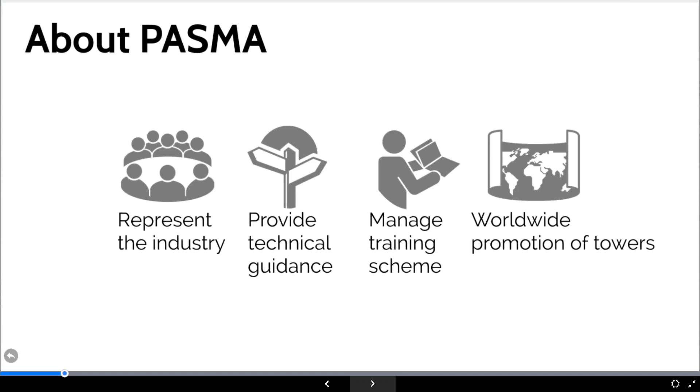So what we're going to cover in this webinar is essentially in 5 parts. We'll start with the safe use of mobile access towers at low level, before exactly why we need inspection and recording, which is critical to safe use, and what products there are.

Now EN 1004 is currently in review, and we know PASMA knows some of the proposed changes, so we'll have a quick overview of what to expect. Finally, we'll look at some of the mistakes people make when using mobile access towers, and see if we can get a bit of interaction at that point.

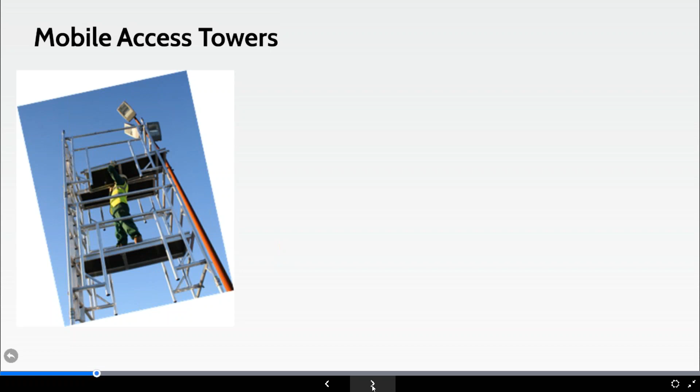There are many ways to work at height, but why select a mobile access tower? Clearly towers are a lightweight option for safe working at height, and ideally suited to provide a temporary working platform. The towers are modular, manufactured from lightweight materials, so the components are easy to transport and very easy to inspect.

In partnership with the Health and Safety Executive, PASMA have identified 2 agreed options and methods for the safe assembly and dismantling of towers, known as the 3T method and the AGR system, Advanced Guardrail System. PASMA trains and instructs delegates on the correct application of both options, so if you send operatives on a course, they will cover both of these agreed methods.

Towers can be used in multiple configurations, meaning they're much more capable than just a standard tower assembly. We see a standard tower assembly on the left using the AGR system, but there are many more dynamic ways to use a tower. In truth, it's fairly simple to assemble, doesn't require any specialist tools or equipment, and clearly provides a safe working platform.

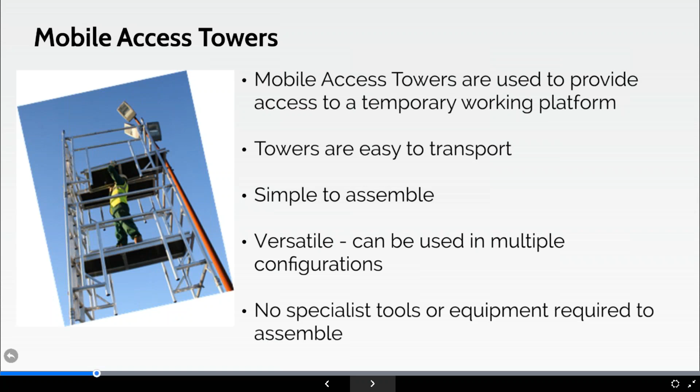Tool and plant hire sectors and rental sectors are major suppliers of mobile access towers, for both construction and maintenance industries. You can frequently see mobile access towers delivered to site at the same time as the task equipment required to undertake the particular task, and they're going to put the tower up, carry out the necessary inspections, and then use it accordingly. Fairly simple, fairly straightforward.

PASMA worked with the Health and Safety Executive to define 2 options for the safe assembly of mobile access towers: the 3T, through the trap, and the AGR, Advanced Guardrail. Here is an actual still image taken from the new PASMA user course, clearly showing operatives using the 3T method to ensure that whoever is building, adapting, modifying or dismantling it remains in a protected position, not working on an unguarded edge.

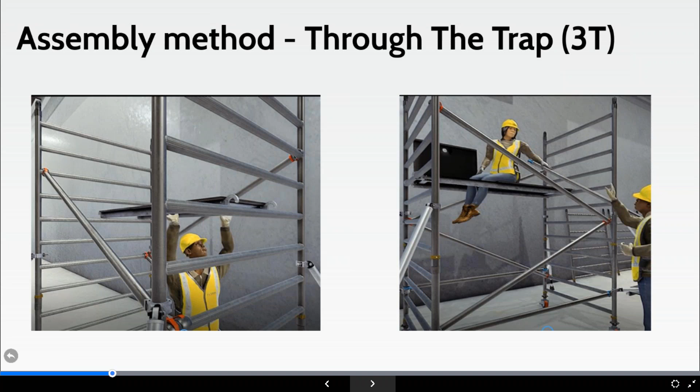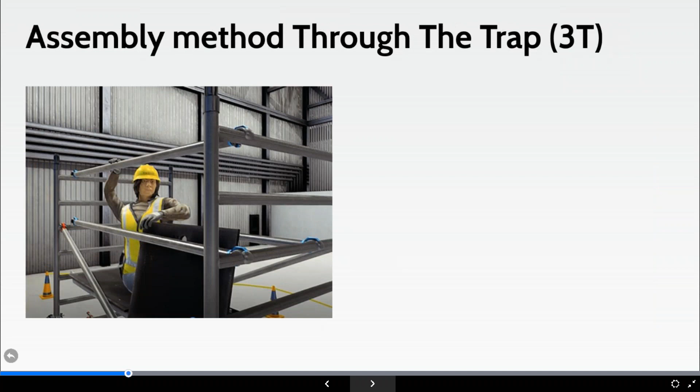You can see the gentleman on the left fitting the platform, and the lady on the right taking up a position through the trap, hence the term, with the operative passing up the guardrails so she can put them into place. Once the guardrails are located by the operative from a protected position, this requires the operative to sit on the platform until all four horizontal guardrails are in place.

Only once all four horizontal guardrails are in place should that person stand on the platform. You can actually fail the PASMA course if the person stands up there with no guardrails fitted, and that has happened on tower courses I've run in the past. Unfortunately it's not a good discussion, but it is part of what we teach.

Build sequence basically means the mobile access tower has to be built with the smallest frame at the base, which always ensures the guardrail frames are in place before standing on the platform. Fairly straightforward, hence why it's called through the trap. It's a well used, well documented assembly method. You can see here that this side of the guardrails are clipped in, but the ones at the back aren't.

Once the 4 guardrails in this situation, because it's a single platform, are in position, the lady will stand up, walk to the back, and click them guardrails in, and at all times she's protected from falling. Then the build will continue up to the next level.

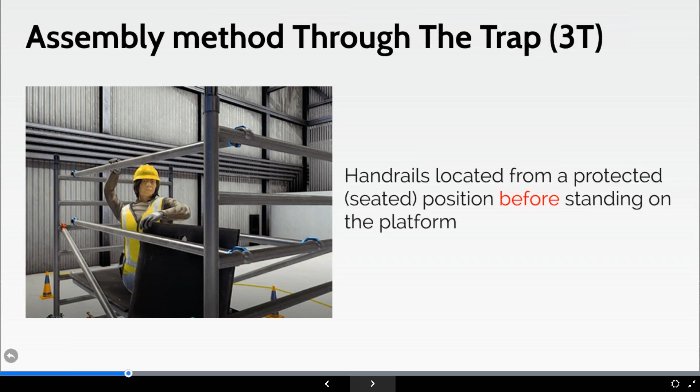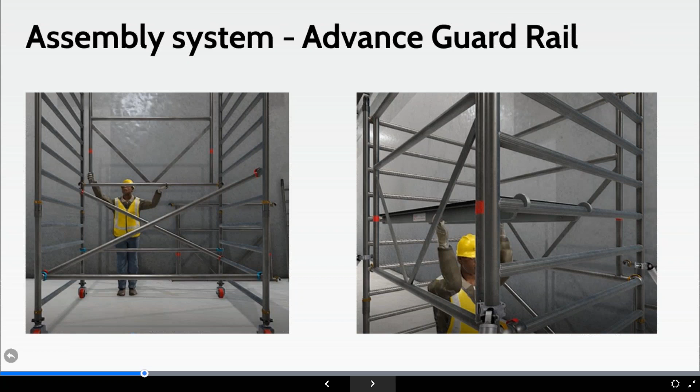Conversely, the alternative build option recognised by PASMA and the Health and Safety Executive is known as the Advanced Guardrail, and the AGR system is provided by a number of manufacturers. On an AGR tower, the frames are located in position before the platform decks. You can see the operative on the left fitting the AGR rails to the uprights, and on the right positioning the boards in place. Once the boards are positioned, as they climb up, the guardrails are already in place, and the same process happens again.

They'll put another set of frames up on top on the left hand side, do the same again, put the advanced guardrail in place, hence the term advanced guardrail, and then place the boards in. So this is a system rather than a method, and it's important you understand that the 3T is a method, there's a methodology there. This is a system build essentially, and you can see that advantage. Handrails are going to be in place at the correct height before they've even got up into the platform. So essentially, providing there's no horseplay and such, there's no essential risk of falls.

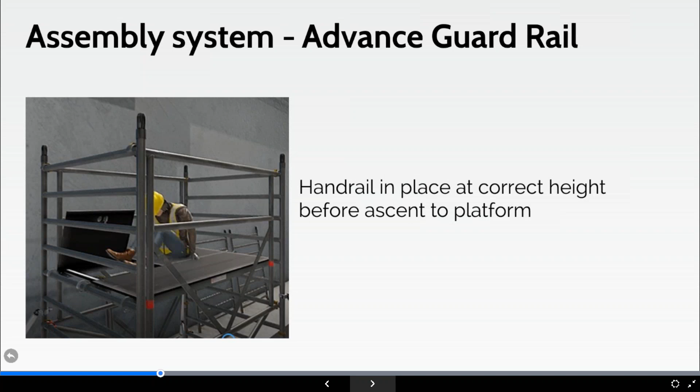So just to reiterate, the advantages of through the trap. It's obviously clearly easy to store and transport the braces. It's versatile in its configuration. It can use existing tower components. Obviously, there's got to be ensuring that the towers are from the same manufacturers and such. But basically, again, build to the manufacturer's spec and the instruction manual that will be supplied with the machine.

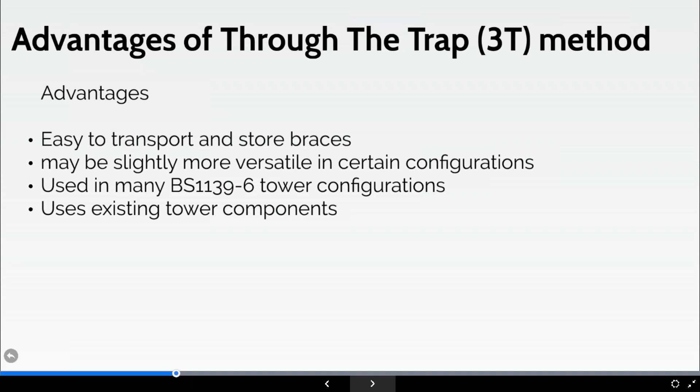Okay, from the AGR part of things, if some of you have ever built the tower using the 3T method, I can tell you now from experience, whenever you put the AGR in front of people, certainly delegates, they sometimes look and think, God, this is going to take forever. It's simple, it's faster to assemble and dismantle in its standard application. Remember, this is a system rather than a method. It's essentially that you've always got people working on the platform with full side protection before they get up there, and clearly it's less components to transport than the 3T method.

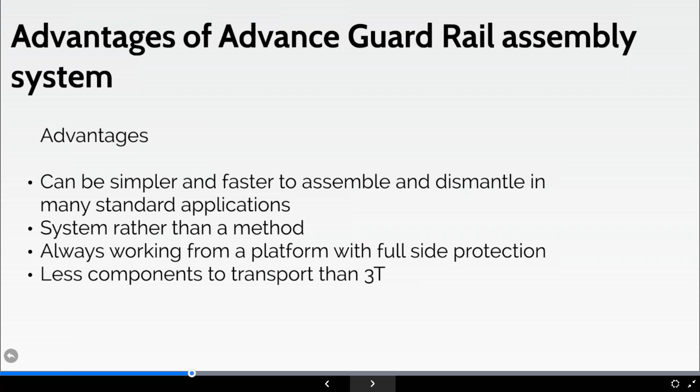Okay, so hopefully that's the two methods put in there, and hopefully that makes sense. You can see there's been a fall protection review, and PASMA work very, very closely with these sort of things, and the key factors in specifying the appropriate assembly option. So I just want to put this in here. Which option are you going to specify on your jobs? Again, does cost factor in? Is the speed a factor? Is it the experience of the operator? Is it essentially down to user preference? Sometimes we don't really understand perhaps what's out there, until you've actually seen them being built, realizing the benefits for them.

Now, basically PASMA have produced a fall protection review, and it gives you details on both options, and PASMA's views on when appropriate to select a certain type of tower, so either a 3T or a system building in terms of an AGR system. Okay, but again, in terms of these, fairly straightforward and fairly straight to the point.

Okay, so just moving on, we're now going to look at low-level access. It's fair to say this has changed dramatically over the last 15 years, and basically in terms of the PAS 250 to 8620, basically the publicly available specification is a sponsored route to help standardize a product.

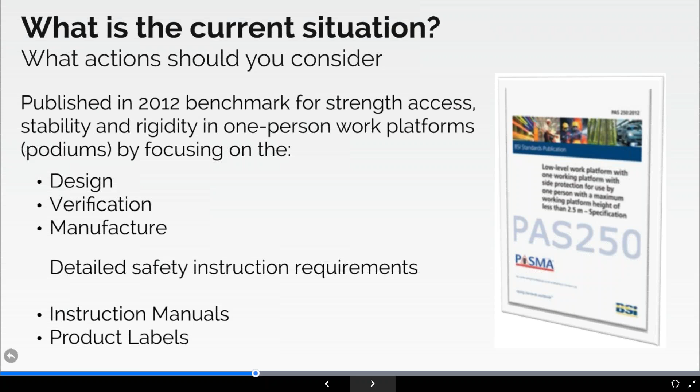Which manufacturers are going to design and manufacture and build them? And then, of course, instruction manuals. What content goes into an instruction manual? There's clearly all sorts of other aspects in there in terms of training. What labels does it need on the side of it, etc. So there's quite a few things there to sort of think and consider. And the current situation is, you've got action, and this is going down the line here. You'll see shortly, we're kind of highlighting some of the issues here very shortly.

So this was reviewed by a panel of industry experts, including users. Best way to get involvement is get the people at the coalface involved. Does it work? Does it do what it needs to do? Clearly, the Health and Safety Executive and trade associations, and to enable that transition to a British standard, PAS 250 was reviewed by a panel of industry experts, including representatives from users, HSE, and trade, which of course included PASMA.

Lessons learned from the drafting and implementation of PAS 250 are reflected in BS 8620, with improved stability and enhanced specifications for side protection, meaning there'll be even greater buyer confidence with British standards recognition. So we had the PAS 250, it did what it did, and then that's moved into 8620.

So, do you use podiums? What's the current standard? What do we need to think about?

What recommendations? Well, PASMA recommendations, and to be clear, if you own or rent BS 8620 podiums, you are using products to their current standard. Continue to use them. Inspect as per the instructions supplied with the product.

So no change essentially. If you own or rent PAS 250 products, you can clearly continue to use these if they're in good condition. However, PASMA do advise that you update your buying policy now to ensure that going forward only BS 8620 products are either rented or purchased in the future.

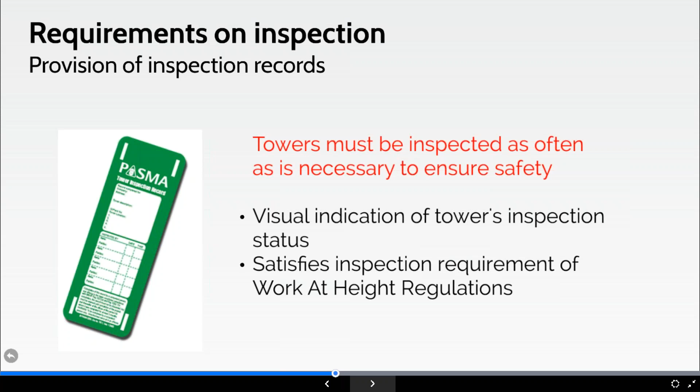If there is a fault with it, for whatever reason - damage, piece missing, whatever - quite simply you would pull the green one out, like you see on most construction sites or in the maintenance industry, and flip it round, and then on the back of it generally it's red. But basically it's a very quick visual indication of its status, and it does satisfy the requirements of the work at height regulations. So to me it's a no-brainer.

In terms of the requirements, again, these are clearly defined. They should be inspected after assembly, after any alteration, after any adverse weather conditions, before dismantling, and at least every 7 days. Now that inspection must be undertaken by a competent person. The results should be recorded and retained for reference. PASMA's perspective is that it's essential that towers are inspected as often as is necessary to ensure the safety of people using the towers.

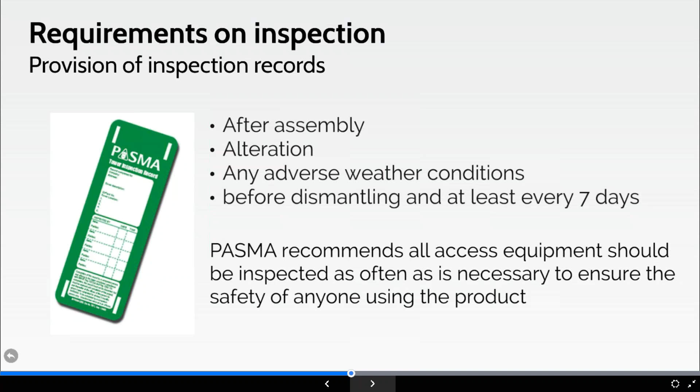Okay, not only does PASMA carry out all the training courses, and there's a wide range of training courses from users for towers, for managers, to towers on stairs, to riggers and advanced courses. So there's more to PASMA than just a tower course. There's more to it, so again, you've got to consider these things.

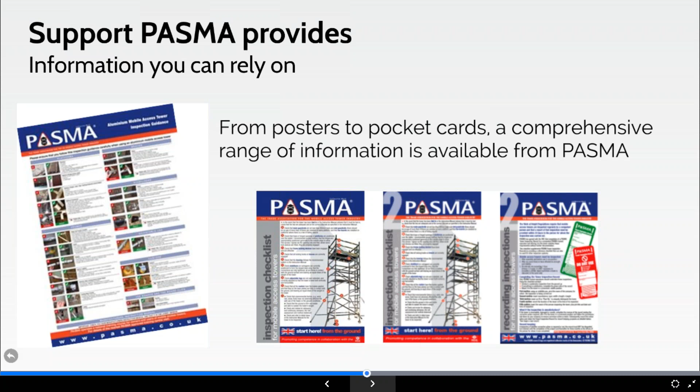But they do have a range of resources out there as well, and these are to help yourselves and managers of people and those who are working at height to understand their obligations. Now these are available in a range of sizes and formats, and the advice is invaluable for people working at height. So you can find more information at PASMA's website in their shop, or of course at any PASMA training centre. These will include things like posters, pocket cards, quite easy to read and comprehend.

The range of advice also goes on now to include a series of info sheets detailing key information to ensure you can also work well with towers. And you can see perhaps some of the info sheets here. If you log on to PASMA's website, www.pasma.co.uk, or download the PASMA app from the App Store, you can get further guidance and support.

Because with respect, we know you're busy people. You look at a tower and hopefully it's got a green ticket attached to it - happy days, move on. But is it built properly? Has it been inspected? What type of tower is it? Is it a system AGR? Is it a method 3T? Even look at them when they're building their towers - do they sit down when they go through the trap? All those little things that you perhaps think, again, we're just trying to mitigate the risk of a serious incident.

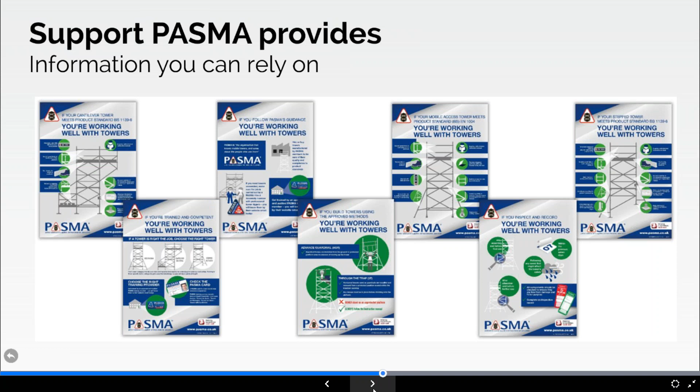Okay, so PASMA website, you should be able to get some information there. If you go onto the PASMA website at the moment, you'll probably be redirected to PASMA Tower Week, of which it's champion at the moment. But you'll be able to navigate around their website.

A major part of PASMA's work is contributing to the setting of product standards, and a review of EN 1004, which is the product standard for mobile access towers, is currently underway. Whilst we don't know the final outcome yet, there are a few areas PASMA are expecting to see changes, and now I'll attempt to explore them.

Anybody who's ever been involved with standards knows you don't just get the UK contributing to that. There's the rest of Europe going to contribute as well, because it does affect them, and we do ship towers out into other countries. So bearing in mind these towers get used around the world, proudly we've got to say a lot of other countries look to what we do in the UK to align their standards to us. So we've got to always stand up. We are a very safe country in that sense.

So, put my teeth back in. The consultation phase is still going. It's expected a decision will come in Q4.

What next? Essentially, the current standard covers products from 2.5 meters high to 12 meters internally and 8 meters externally. So a key change is likely to be updating the standard to start from ground level, essentially getting rid of that first 2.5 meters. This means all low-level scaffolds will then, when the standard is adopted, be covered by the standard.

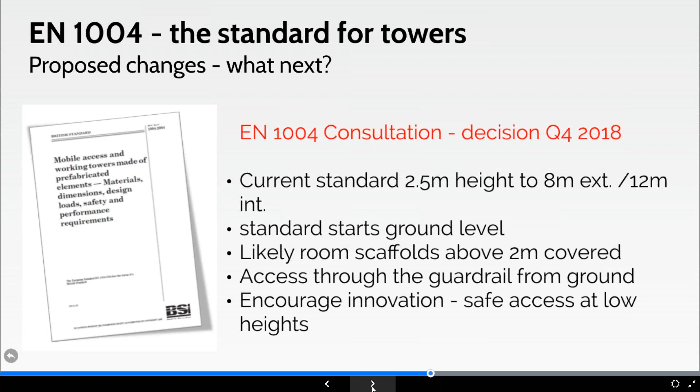Okay, so competence. PASMA definitely wanted me to mention this - they're frequently asked to clarify the position around training and competence. Essentially, the Work at Height Regulations are clear: all persons working at height are required to be competent using the relevant equipment, and they must be able to demonstrate their competence.

So, people at height - okay, say I'm a tower user. I've built my tower using somebody else that's trained. We've built the tower - does everybody on the tower have to be trained? This is the thing: it says competence. If I'm taking somebody else up there who isn't a trained person, I've been asked this so many times - does that person have to be trained? And the answer is no, they have to be competent.

How you deem that person to be competent - whether it's by putting them on the Tower User course, brilliant, get them trained, no arguments there - or by doing some type of internal training, putting them on a Work at Height Essentials course with PASMA, all those sorts of things can contribute to that person being essentially competent.

So in addition to setting product standards, providing advice, good practice, and auditing members, PASMA also manages the industry's recognised training scheme. Some of you on this webinar this morning, I'm sure, have had delegates and operatives who've been on these courses. From managers to users, novices to professional riggers, successfully completing the written and practical tests is an excellent way of demonstrating competence.

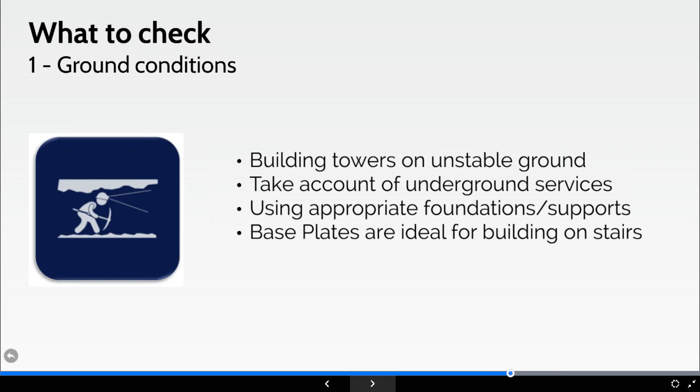So again, foundations may not always be flat. The foundation may be a stair, which clearly isn't flat, so we're going to put a base plate on there instead of a caster. That would be the ideal and safer way.

Stabilizers are a major source of questions for PASMA. To be clear, stabilizers should be applied and fixed to the tower at the earliest opportunity, but you should always follow the manufacturer's instruction manual. Check that stabilizers are correctly positioned for maximum effectiveness.

Can you calculate the type of stabilizer to use by following the 3:1 height to base ratio rule - for every 3 in height, you increase the base by 1? The answer is no. It used to always be 3:1, common with everything, but the answer is no. The only way to check you're using the correct stabilizer is to refer to the instruction manual supplied with the tower. Don't fall into the trap of thinking you can just fit them - check the manufacturer's instruction manual and fit accordingly.

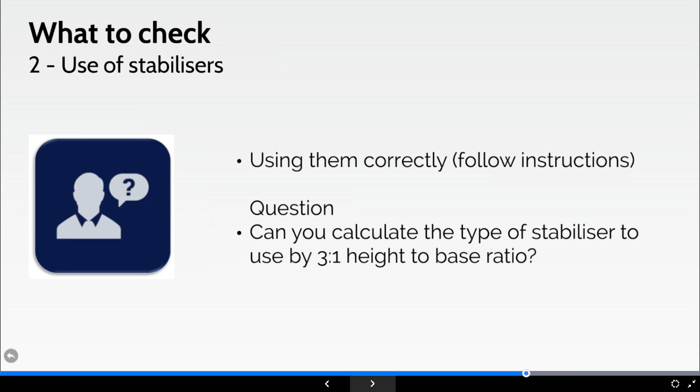You only have to go down the high street, or into some shopping centres, and horrifyingly you'll see towers built without stabilisers, even in our country. You've got to be mindful that the thing may look stable, but things can happen.

Lower standards? It's a source of confusion for some people - they think they don't need training, don't need toe boards because they're below a certain height, they've already had the PASMA user course or been on a ladder course, so they don't need to do anything else for low level work, don't even have to bother with handrails. To be clear, lower level does not mean lower standards, and it's often a real source of confusion.

There are frequent questions about the use of handrails - the minimum height to fit, does it need toe boards? To be clear, the requirements on training don't vary by height, but the risks can be amplified. PASMA does provide bespoke training for working on low level platforms. Toe boards should be used in every situation where people or materials can fall from a platform and cause an injury, and guardrails must clearly be fitted.

At the end of the day, remember the Work at Height Regulations - we've had them for a good 13 years - they apply at any height.

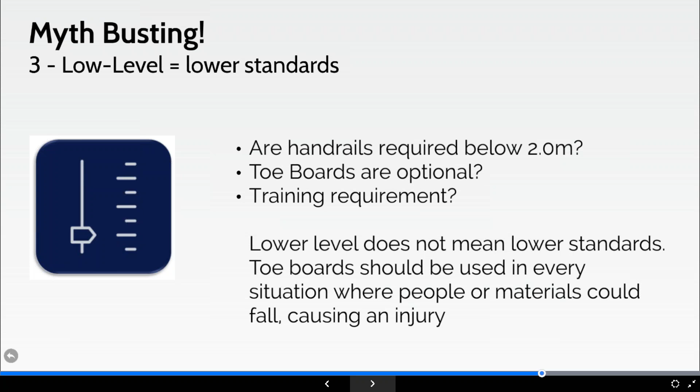Inspecting: we covered the resources available from PASMA earlier, and there are some great things you can download, or even use the app to check. But what are the key points to remember? The tower is to be inspected before use, after moving or dismantling, and at a maximum of 7-day intervals, and of course in any situation likely to affect the tower.

Today it's windy, the sun's out now but it's still windy. We're coming into the colder part of the year - we've been fortunate recently, but we're going to have snow. So there are all sorts of aspects you need to consider.

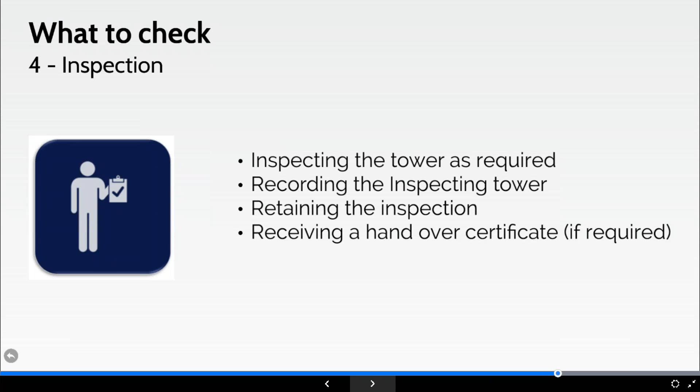Also, retain any inspection record - how are you going to prove that you've had your towers inspected and that you've been doing what the regulations state? And of course, receive a handover certificate for the tower if you need it.

Okay, so just a little bit of defining competence then. So a bit of interaction really, let's see what you, the listeners, feel with these statements. So you'll see now I'm going to select a question.

Do you think managers should check the competence of subcontractors? I'm just going to launch this now. It takes a second, so if you can just answer that accordingly, please. Hopefully it's not a difficult one. It's still collating responses. Only 82% of you have voted, so I know there's still quite a few not voted. 86 now, some have just looked back at their screen or finished their cup of tea.

Okay, I'm going to close that one. Okay, that's good. I'm now going to look at the next one. Do you think that you should always check the PASMA operator's card before the tower is assembled?

I'm just distributing this poll now, so you should see this coming up now. Do you think that you should always check the PASMA operator's card before the tower is assembled? Okay, a couple of seconds, only 78% of you have voted. Some of you are being shy on me. That's gone up now, thank you. I have a little screen in the corner so I can see when you're doing it. Okay, you've all voted now, well done, thank you.